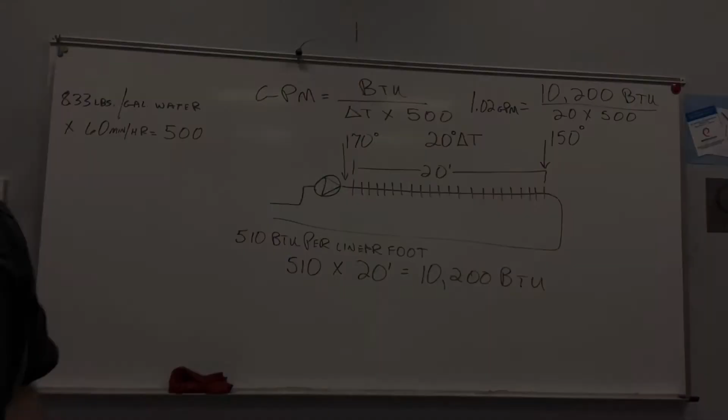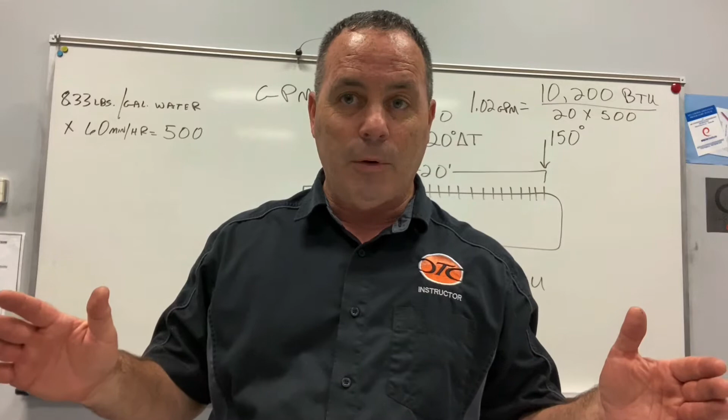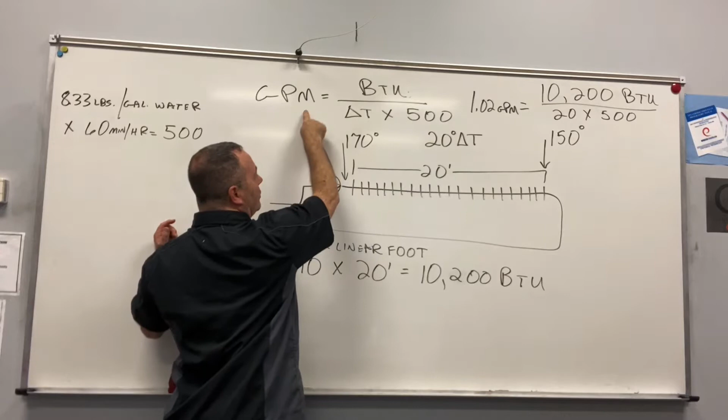Now, one form of math they want you to do is calculating zone flow rates in gallons per minute. Let's take a finned baseboard 20 foot long with a 20-degree delta T across it. We want it at 170 degrees. So let's find out how many gallons per minute of water that is. The formula they give you is BTUs over delta T times 500 equals gallons per minute. There's your formula, let me put a square around that.

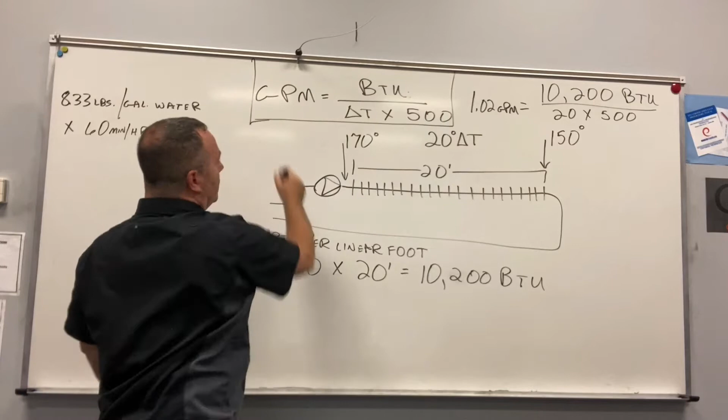There's your formula. Now you have a 500 up there. Why is there already a 500? Don't you love math problems where they already have a number in there, and you don't even know what it is yet? Your next code word is charcoal.

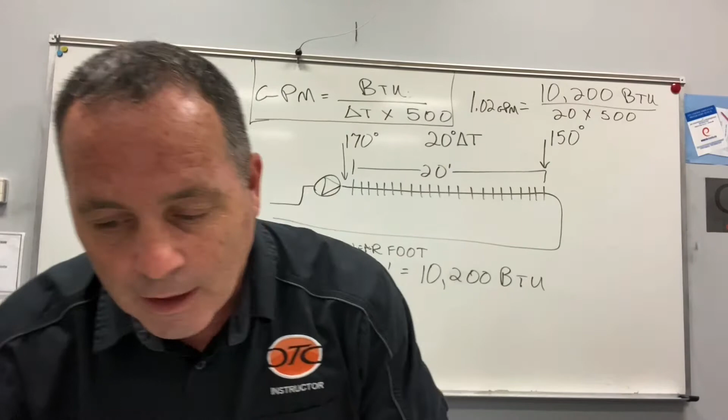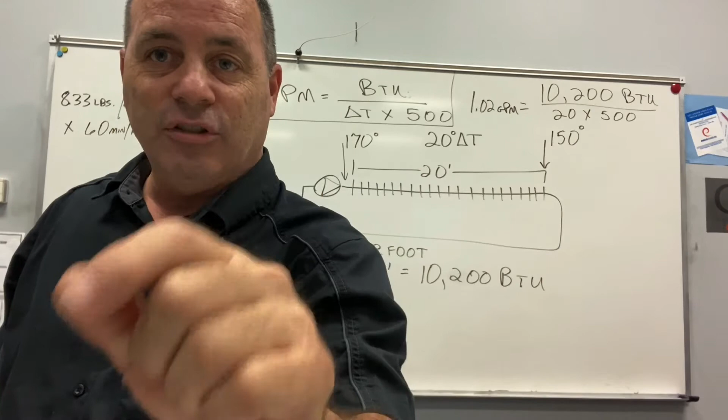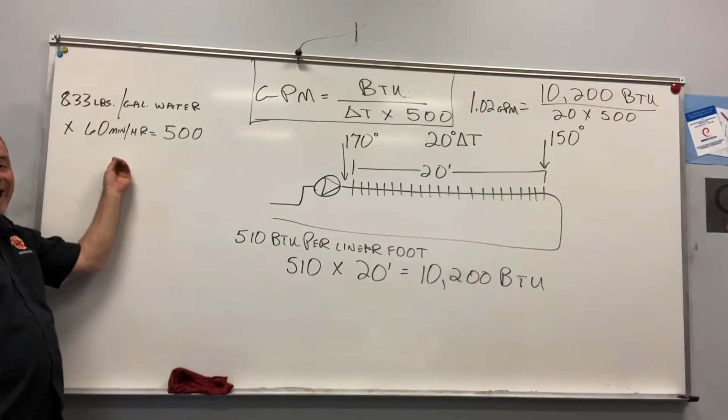So let's look at that. How did we get 500? One gallon of water weighs 8.33 pounds. I needed to know that to calculate gallons per minute on my contractor's exam. To know what that is in 60 minutes or an hour, we have to multiply it. So 8.33 pounds, which is a gallon of water's weight, times 60 minutes equals 500. So the weight of the water and the time it takes to move it in gallons per minute is 500. That's already done for us.

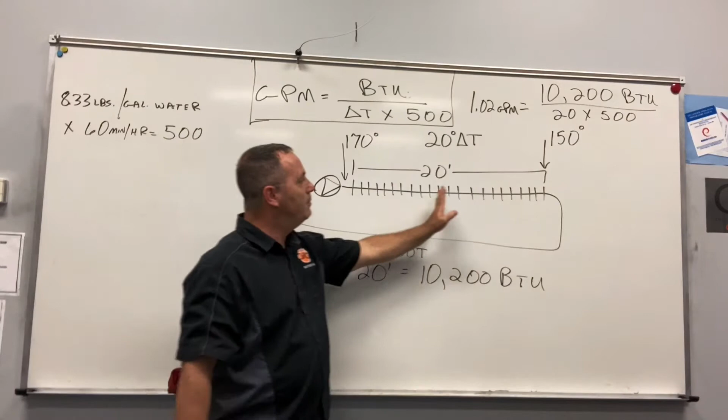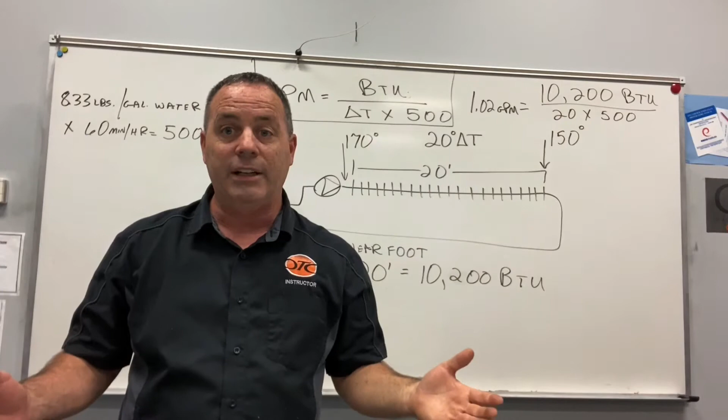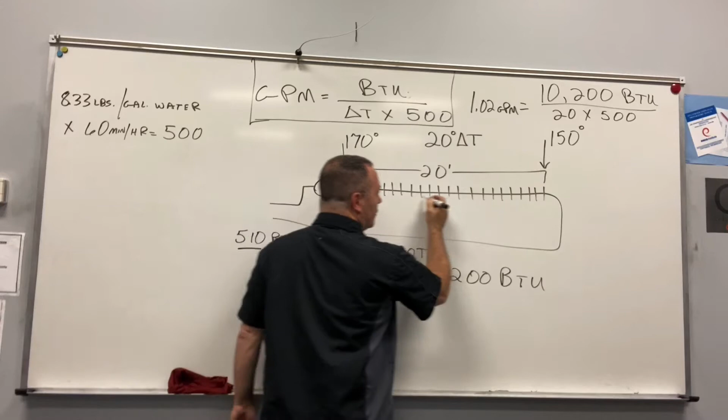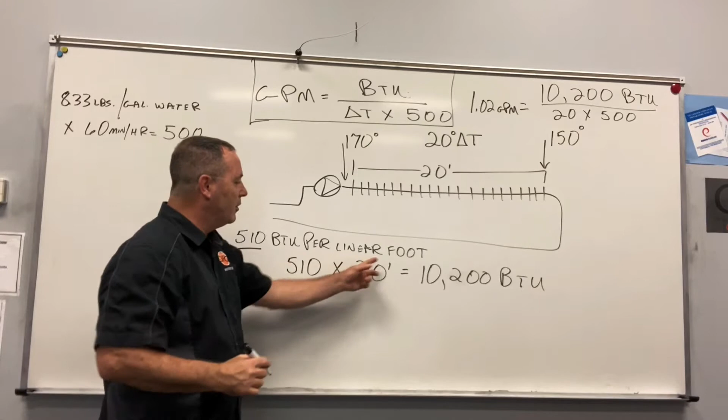Now, next, we have a 20-foot baseboard with a 20-degree delta T. The water comes in at 170 and it comes out at 150. So to give up that 20 degrees, we need to know how many gallons per minute we need that water moving. This particular brand of baseboard gives us 510 BTUs per linear foot. So for this linear footage, each foot is 510 BTUs. Still with me? So we got 510 BTUs per foot. How many feet do we have? That's right, 20 feet. When we multiply that, we get 10,200 BTUs.

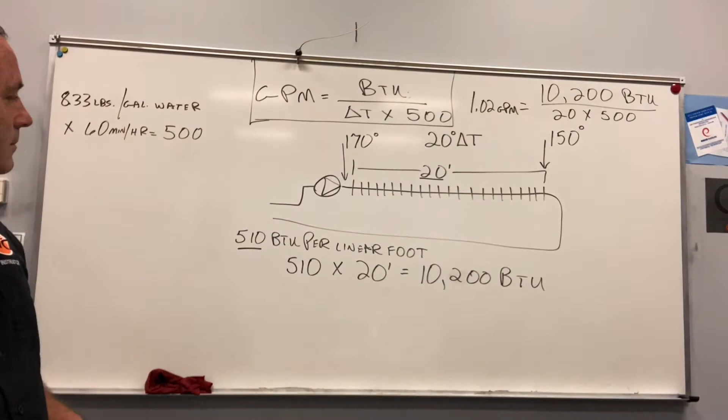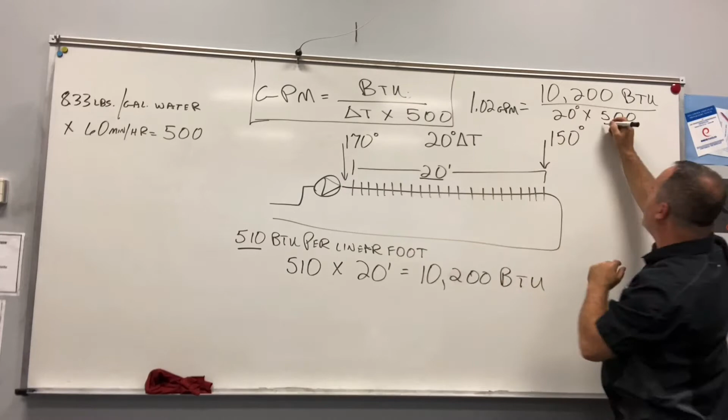So now we got what we need for our math formula. Let's take the BTUs, 10,200, the 20-degree delta T, and multiply that by the 500. The answer we get is 1.02 gallons per minute. And that's how they did that in your book right there. They want you to know how to do gallons per minute.

Okay, so we're on page 492, and it says the series loop math. Let's look at this. It says you design 3 terminal units, 20,000, 30,000, and 50,000 BTU. We'll assume the water supplied is 180 and it returns at 160. So how do we get the gallons per minute for 3 units when we add them together?

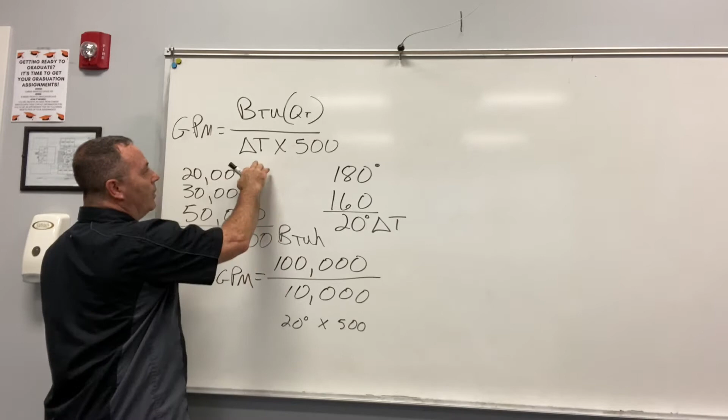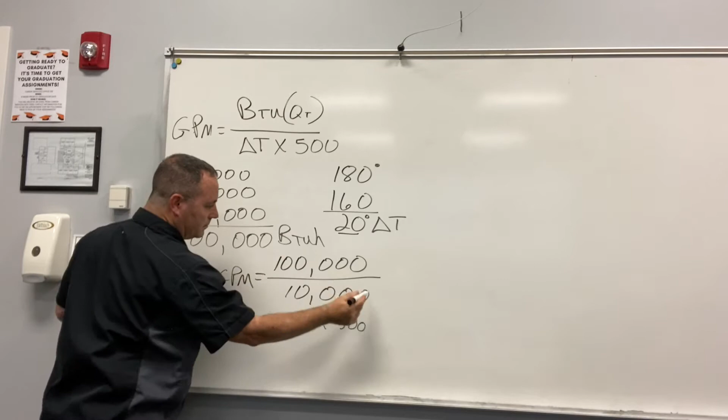It says the first unit, here's your math formula, BTU, which is actually QT, delta T times 500 equals gallons per minute. We just did that. So we have 20,000 the first terminal, 30,000 the next terminal, and 50,000 the third terminal. So we have 100,000 BTUs per hour. We know the delta T was 180 in, 160 out. So we take the delta T times 500 and we get 10,000. We know the BTUs, so that gives us 10 gallons per minute is what we need for those 3 units at that temperature.

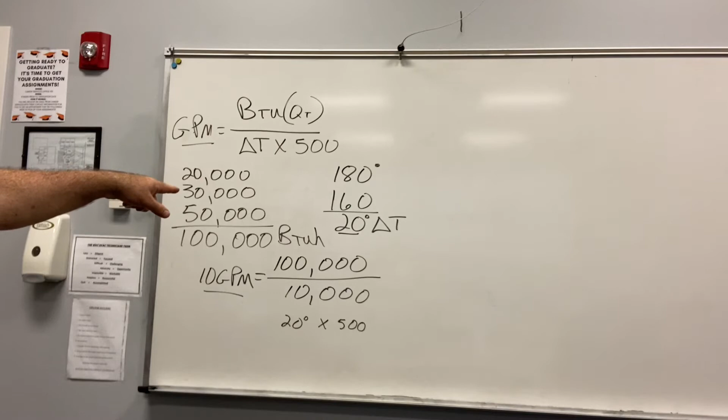Now your book says next, we know that there will be 10 gallons per minute of water flowing through each pipe and circulator operating. We can now determine the temperature of the water at the outlet of the first terminal using a variation of that formula. Let's look at this math formula in your book. We can determine the temperature of the water at the outlet of the first terminal using the gallons per minute we already worked out. So we know it's 10 gallons per minute.

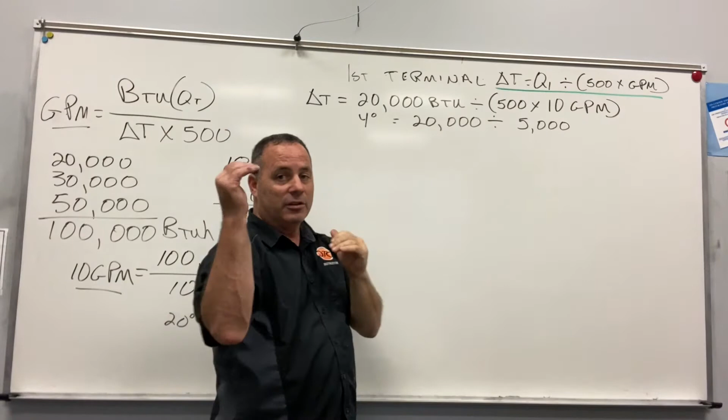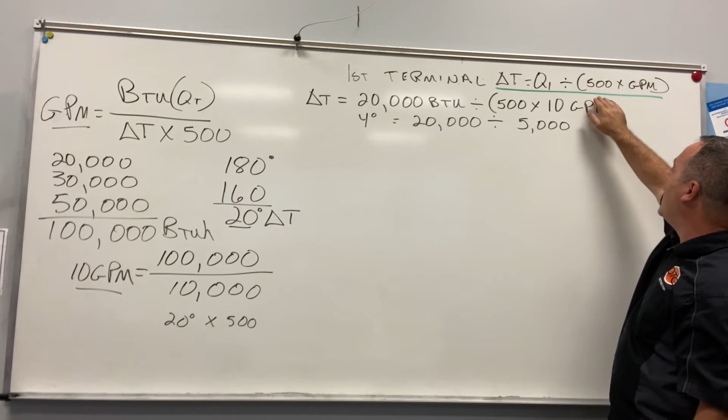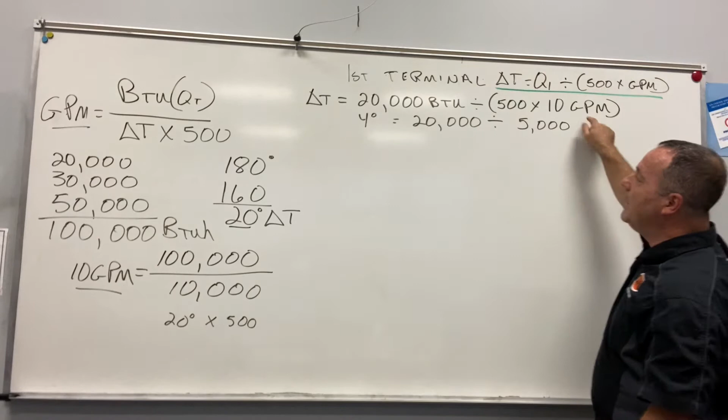The formula for the temperature coming out of the first terminal is: delta T equals Q1, which is the BTUs of the first terminal, Q terminal 1, divided by 500 times the gallons per minute. Well, we know the gallons per minute, it's 10. And we know the first terminal is 20,000.

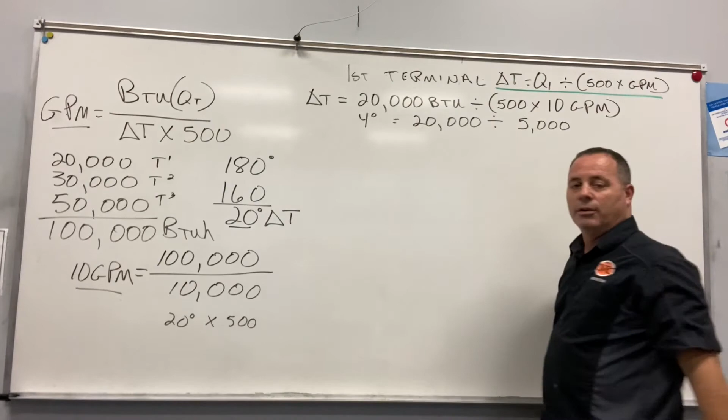Terminal 2 and terminal 3. So all we did was the math: 20,000 BTUs, now 500 times 10 equals 5,000. That gives us 4 degrees. Pretty simple math. Now let's do terminal 2 and 3.

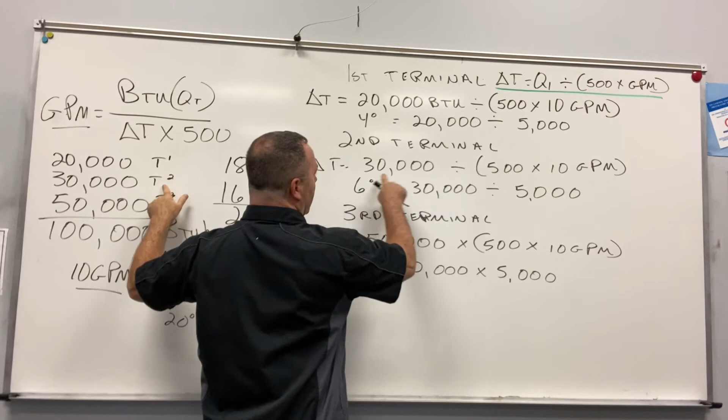The second terminal is 30,000 BTUs. You're going to use the 500 times 10 is 5,000. Do the math, it comes out to 6 degrees. Your third terminal is 50,000 BTUs. Same gallons per minute, you already figured it out, and it comes out to 10 degrees.

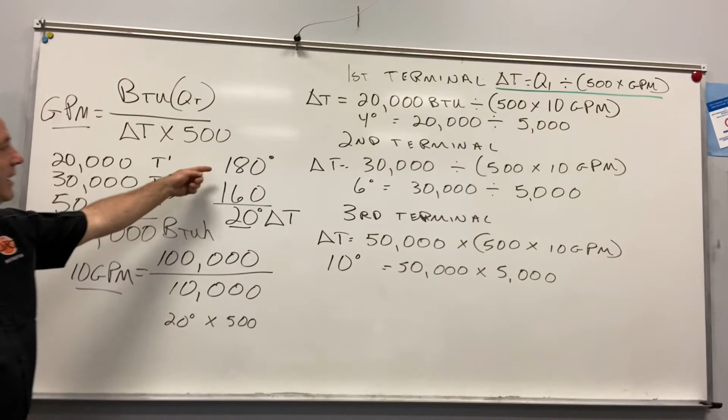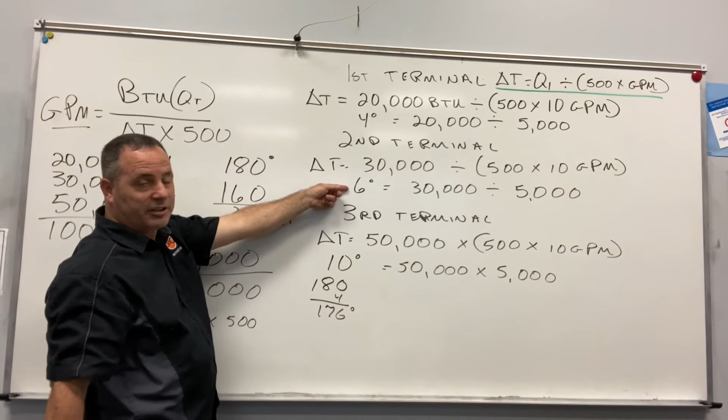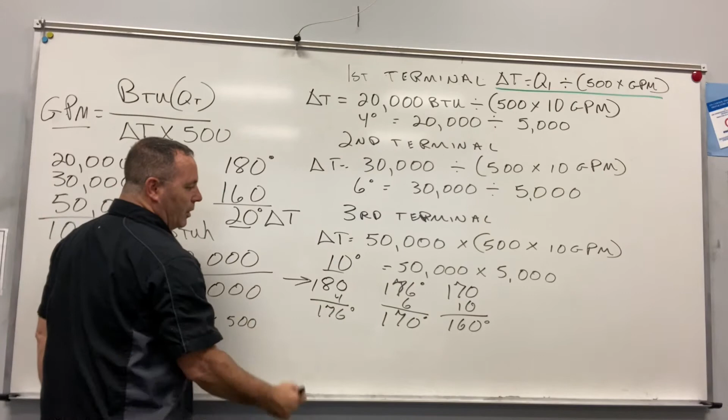So originally we said the difference was a 20-degree delta T between 180 and 160. Let's see if that worked out correctly. The first terminal we gave up 4 degrees, so we started with 180, gave up 4 degrees and got 176. Then we gave up 6 degrees, 176 take away 6 equals 170. The third one, 10 degrees, so we have 170, take away 10, and now we're at 160. So we know we started at 180 and ended up with 160, and that's our 20-degree delta T.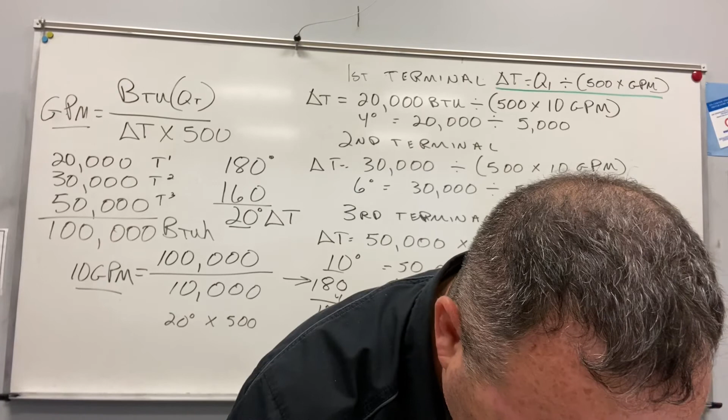So that's what your book's doing right there with the math. And they're saying you can do that with all your different piping configurations for the next few pages, and you can do it over and over and practice it like that. So it pretty much gets redundant. They start talking about the temperatures in each separate piece of pipe. Okay, your code word right now is alligator.

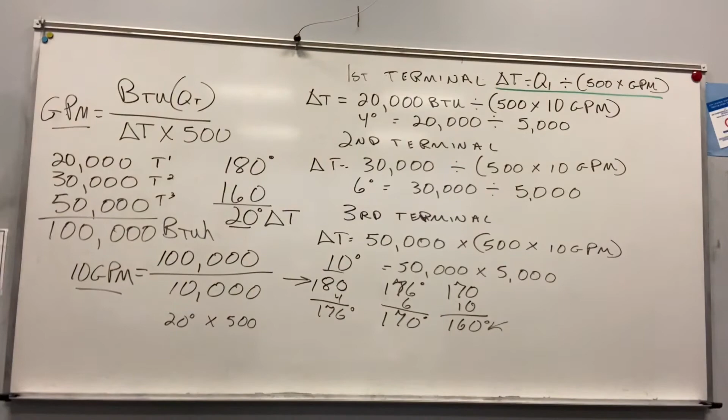Okay, now we're on page 1006, talking about radiant heating. 1004. Okay, your next code word is swordfish. And it says, like hot water hydronic systems, radiant heating relies on circulation of hot water through a series of pipings. So what is radiant heating? It goes along the floors, walls, and sometimes the ceilings of the structure. If you look at 1005, that page, they show you PEX tubing that can be used, which is polyethylene tubing.

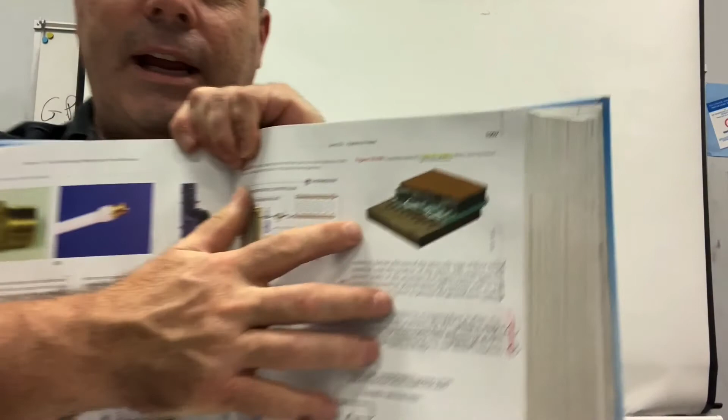Now, radiant heating piping can be installed with slab on grade or thin slab, dry. Well, what is slab on grade? Remember, grade is ground level on the floor. So slab on grade says these applications can be poured concrete over them. So they look something like this. This is a slab on grade right here.

Then you have thin slab, where you put a thin layer of concrete over it, over the floor, and the concrete poured over it is 1.5 to 2 inches thick. That's thin slab. And the only other thing you really have in your book, in the back, is solar, which just talks about using solar energy to heat the water in your house and help heat it using the solar energy. And that's about it.